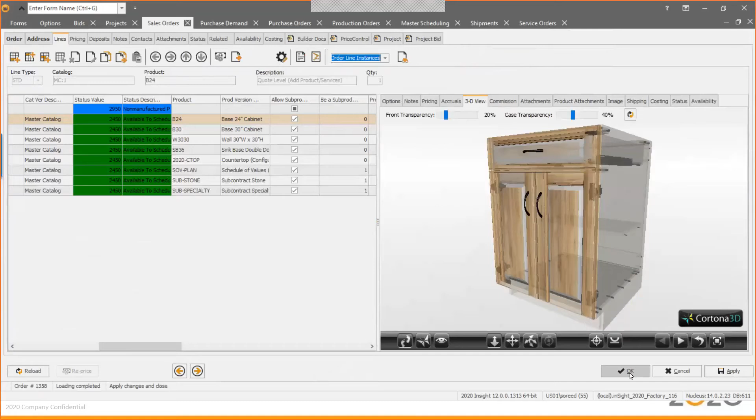I'm going to go ahead and jump out of that. Then I'm going to do just a little introduction to this, and this is just a concept for designing catalog or layout based products. You could actually create a product that is a room or perhaps a wall-to-wall base run with the countertop and its casework. So I'll bring this on over and explain a little further. So what that looks like is a custom cabinet at...

I could... here, I'll edit that. I'll go ahead and put it at 108. And we can do the colors again with the countertop, and that's going to drive our purchase and our slab.

And then we have something where we have this 4-run base of cabinets, and I can control each one of those individual zones of what we call a cabinet zone from left to right. So let's take a look at that cabinet now.

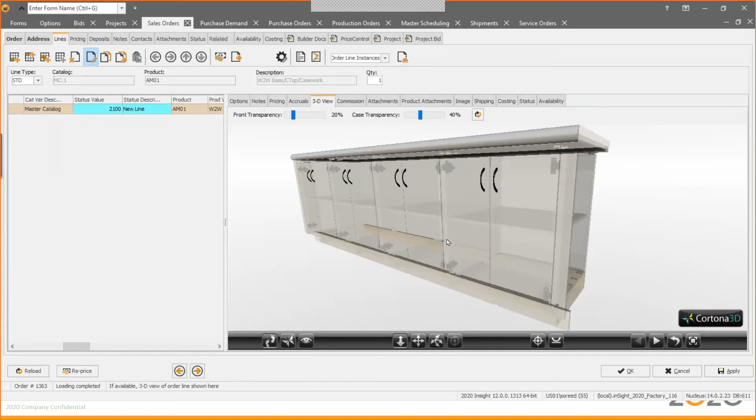So what I'm doing right now is I'm assigning the zones a different layout. I went ahead and just put a 100 on the outside and a 100 on the other outside. So when we look at this, it's going to generate a cabinet.

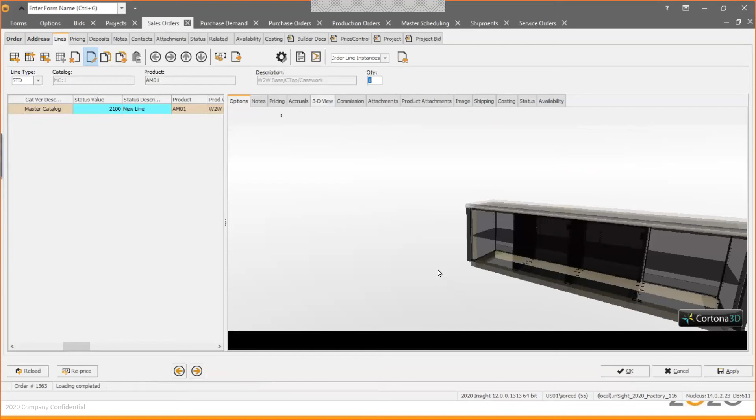Okay, so our configurator is based off of AutoCAD 2020. So as you can see, it's...

Share your doors. You can design rooms. You can import entire rooms. You can modify and manage your articles. We have a library of products that we've begun for architectural millwork based off the cabinet design series. So you can see we have some of the heavy hitters that we're going to see in architectural millwork, and we're starting also some of the accessories that you need to see.

Tiles and wall systems, and we'll also talk about how with those wall systems we can have a blocking drawing all tied to this as well. So again, AutoCAD 2020 and a program on top that, let's go ahead, I'll just show off a little bit. This is a room that's been designed inside the software.

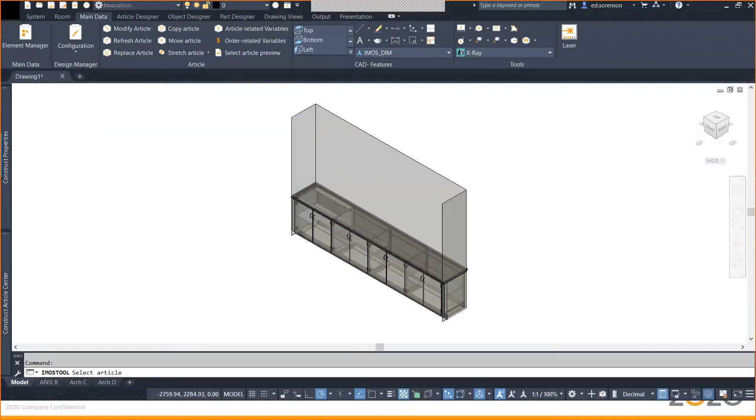And we'll take a look at it real quick and see the room. This is just an A101 kitchen that we called it. And then we have the walls as part of the model. So this whole thing is flexible, it's parametric. So once we get our field dimensions in, we're not redrawing things, it's going to automatically have things recalculate.

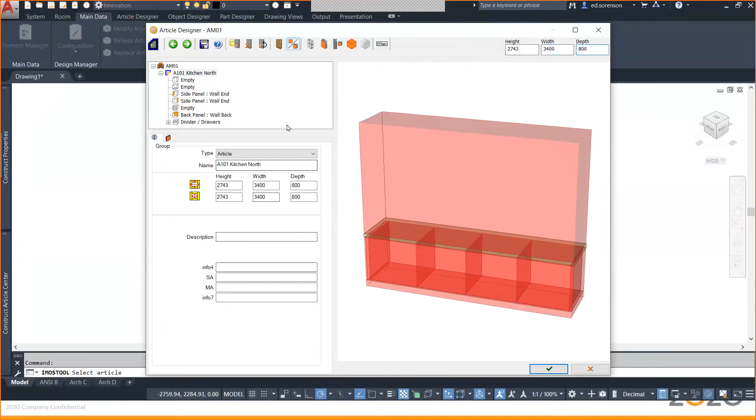And so I can do things like depth, and the model's parametrically going to change. Okay, and so we also have a countertop level, and it goes on further down to the casework itself. We have the base assembly, and then we also have the casework that is being divided into zones, call them zones. So we have a linear division that goes up.

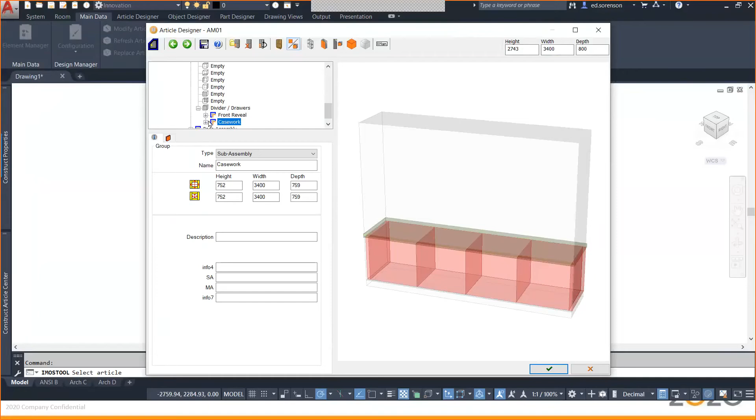We can actually control... see a left filler on the side that actually has the scribe going into the wall, and then the cabinet zones themselves. So these are all variable, we can assign any cabinet into that zone. I'm going to just go ahead and hit save the changes, and we can see the model regenerate.

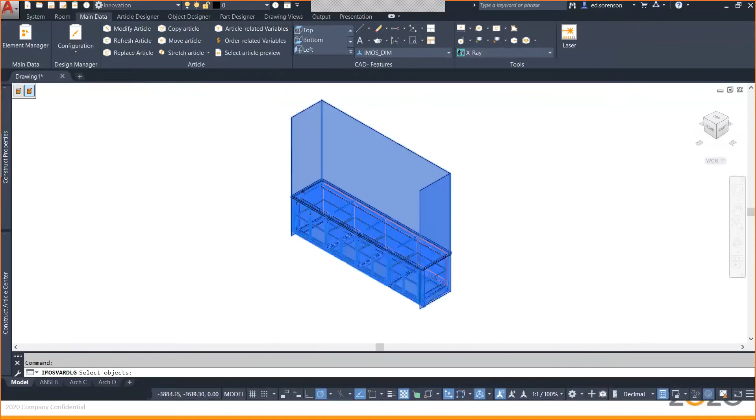And there we go. Just a little background on the variable structure, let's take a look at the article related variables. If we open this article or model, you can see all the different variables we're taking into effect that we can change on the fly. We have countertop specs, and we have the configuration where I mentioned we can change values.

So I can put maybe a 100 in there, and I'm just going to hit apply, and you'll see the model change once again. So this is just a real brief look at the engineering configurator and the software behind it. We are excited, this is brand new that's coming out to us, and we're excited to show this off.

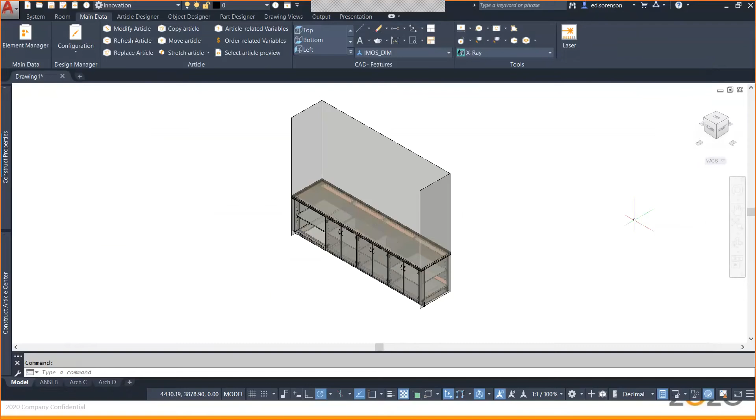Now let's move back over to Insight, and let's go ahead and move on over to shipments. I've got some shipments that I created, and I just want to explain how that looks.